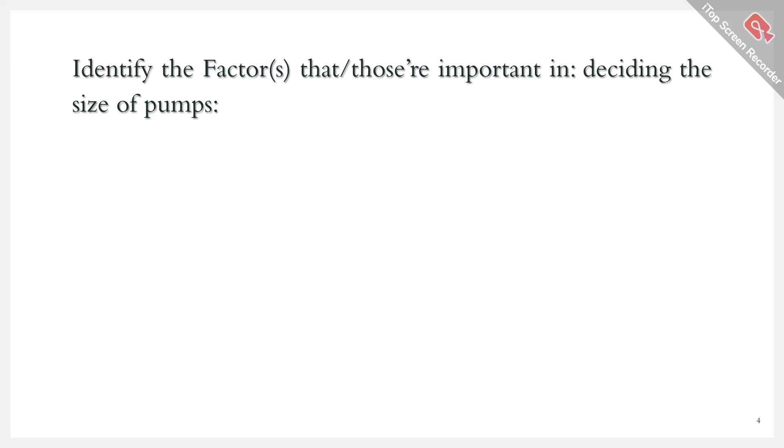Okay, let's start. Today's first question is to identify the factors that are important in deciding the size of the pumps. Option A is flow needed at the point of connection to the distribution system. Option B is fuel consumed, and option C is discharge head.

Okay, so the explanation is something like this. Pump sizes are determined as per the discharge head and flow needed at the point of connection. So both option A and C are the correct answers. Fuel consumed is not a correct answer, because fuel consumed is related to the motor. Generally, motors are electrically driven or driven by fuel oils like diesel or petrol. But the major two things mentioned in the specs of the pump, the specification details, are the flow rate, mostly in meter cube per hour, and head, discharge head.

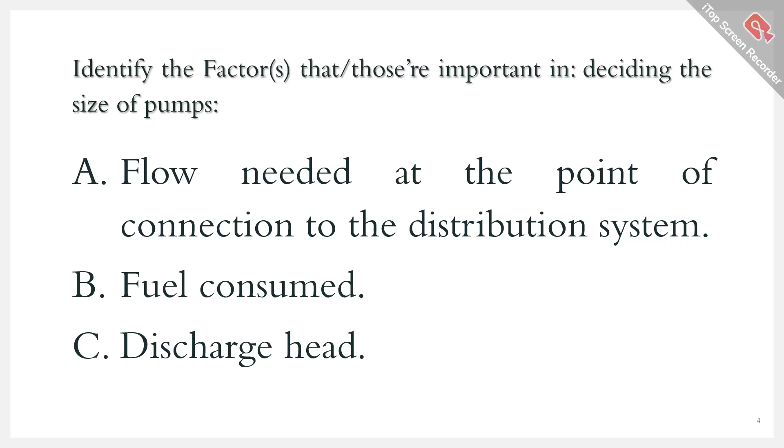So if we see Bernoulli's equation, P by rho g plus v square by 2g plus z equals constant, there the term z is the head, or the entire thing is head when pressure is divided by the product of density and gravity, the gravitational constant, and in this way pressure is converted into discharge head. So these are the two major things mentioned in any specification of pumps. Option A and C are the correct answers, and B is not correct.

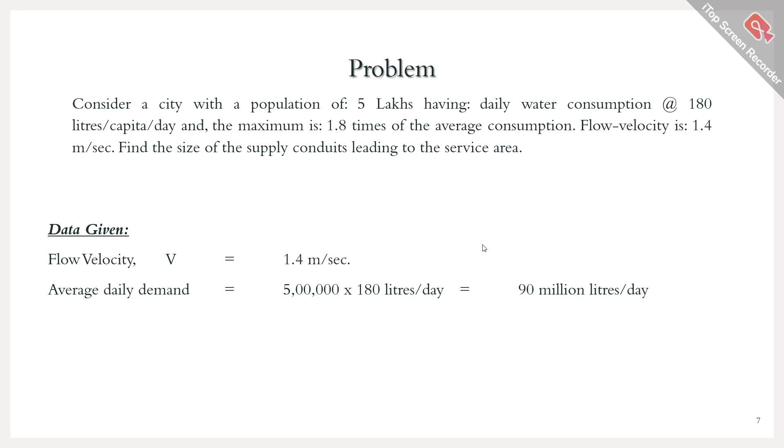So the data given are: flow velocity V is 1.4 meter per second. Average daily demand is 5 lakhs into 180 liters per day, which is 90 million liters per day. Now maximum daily demand is 1.8 times the average consumption. Average daily demand is calculated by multiplying the population with the per capita daily demand. If we multiply these two, it becomes the daily demand of the entire population. Now, this is the average daily demand. If we multiply it with the factor 1.8 given in the question, we get the maximum daily demand as 162 million liters per day, or MLD.

Okay, so the solution is something like this. First, we have to calculate the maximum design capacity, or Q, based on the above data.

So it is nothing but 162 into 10 to the power 6, as million means 10 to the power 6. We have discussed multiple times in earlier classes that million means 10 to the power 6. So 162 into 10 to the power 6 divided by 1000 into 24 into 3600. Why this factor came? First we have to convert liters into meter cube. 1 meter cube equals to 1000 liters, so that's why we are dividing with 1000. Then we are taking 1 day means how many seconds. 1 day means first 24 hours, and 1 hour means 3600 seconds, so 1 day means 24 into 3600 seconds. To convert this maximum daily demand, which is million liters per day, into meter cube per second unit, we are dividing it with this factor, that is 24 into 3600. After simplification, it gives 1.875 meter cube per second.

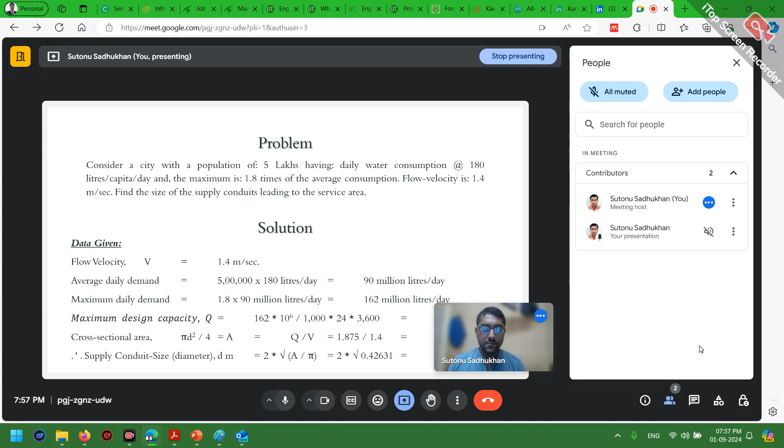So our next MCQ is... previously, the 1.306 meter was the answer, which is, whenever the size is being asked, the size of any supply conduit or pipe means the diameter of the pipe.

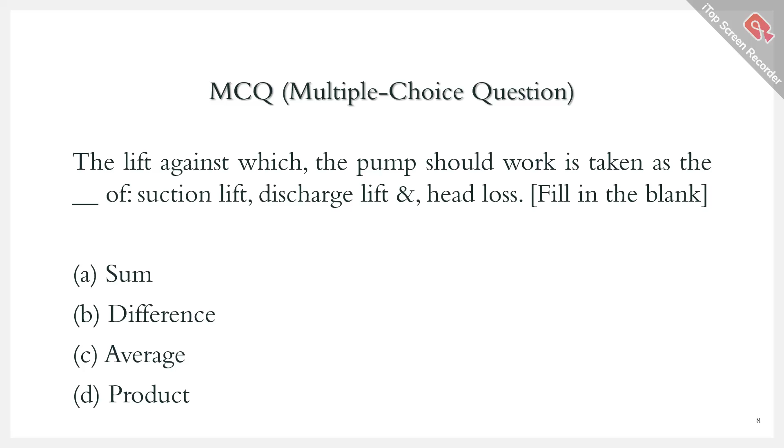Now the next MCQ is: the lift against which the pump should work is taken as the blank of suction lift, discharge lift, and head loss. We have to fill in the blanks. Option A is sum, option B is difference, option C is average, option D is product. The lift against which the pump should work is taken as the what of suction lift, discharge lift, and head loss? So the answer is the sum. The pump should work against the summation of the suction lift, discharge lift, and the head loss.

The head loss is nothing but the pressure drop that occurs when the fluid flows through the pipeline due to the friction of the fluid layers with the inner wall of the pipe, and whenever the fluid gets collided in the vents, then also head loss occurs. Discharge lift and suction lift are the lifts in the discharge side and suction side respectively. So the pump should work against all of them in order to lift the water or fluid.

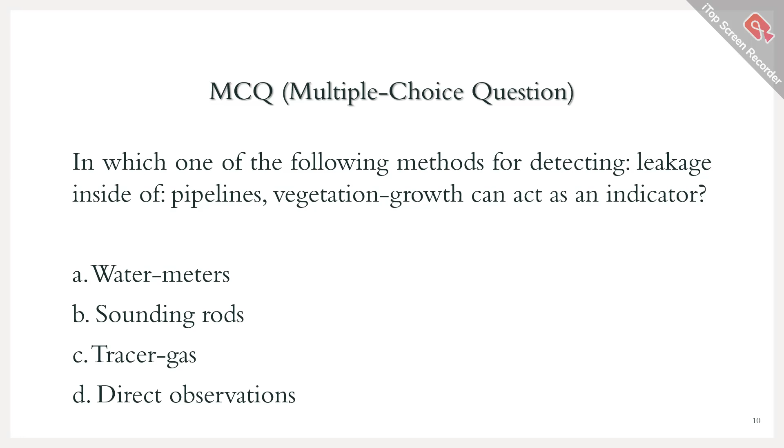The explanation is: visible wet areas and/or unexpected vegetation growth are detected through direct observations. So the answer is direct observations.

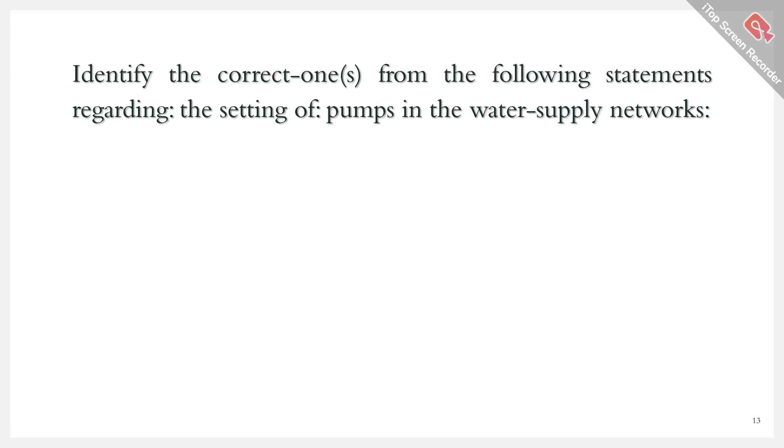Now we will have to identify the correct ones from the following statements regarding the setting of pumps in the water supply networks. Option A is butterfly valves are used for isolating the pumps in the suction side. Option B is check gate valves are installed in the discharge sides. Option C is pressure relief valves are used in the discharge sides for flow control, pressure regulation, and to protect from surge pressures. Option D is vacuum relief valves are used on the suction sides for the vertical turbine pumps. We have to identify the correct ones from the following statements regarding the setting of pumps in the water supply networks.

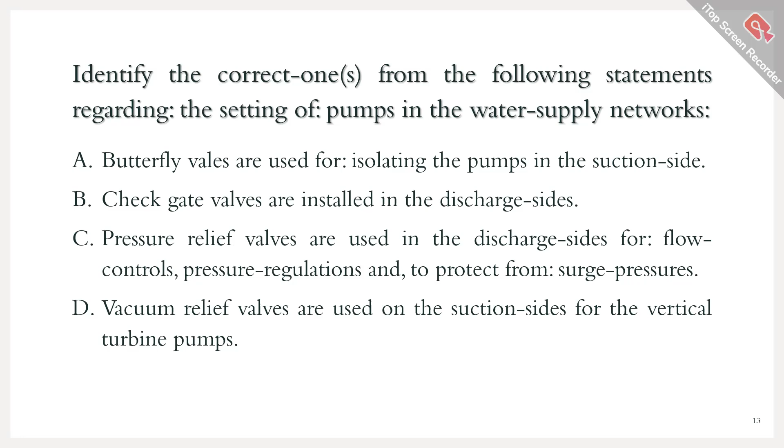So the explanation is: sluice gates or gate valves are used for the isolation of pumps in the suction lines. Butterfly valves are not used in the suction sides. Air release and/or vacuum relief valves are used on the discharge sides for the vertical turbine pumps.

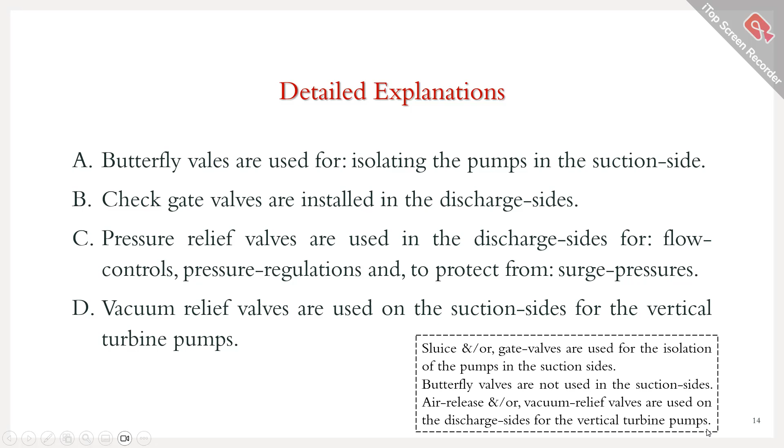So option B and C are the correct answers. Check gate valves are installed in the discharge sides, not in the suction sides, and pressure relief valves are used in the discharge sides for flow control, pressure regulation, and surge protection. Whereas vacuum relief valves are not used in the suction sides, they are used in the discharge sides, and butterfly valves are not used in the suction side, they are used in the discharge side.

Okay, now next is a problem. A water supply scheme is to be designed for a population of 5 lakhs. The storage reservoir is located at a distance of 13 kilometers away from the city. Consider head loss from the source as 15 meters. The average demand is 250 liters per capita per day. Assume that the maximum demand is 1.6 times the average. Estimate the size of the supply main using the modified Hazen-Williams formula. For metal pipes, consider CR equals to 1.

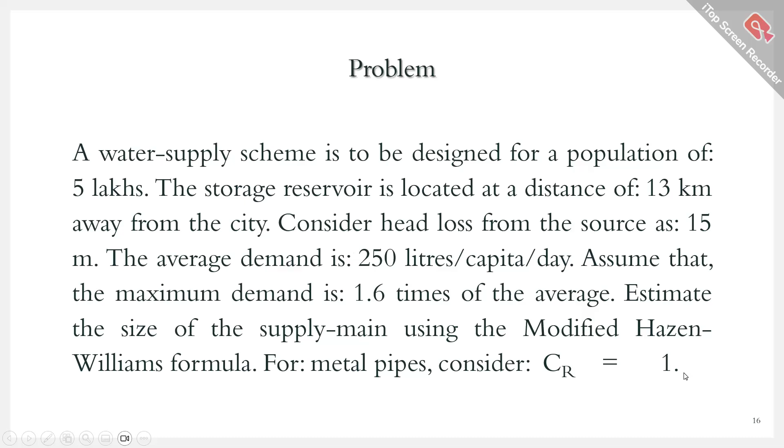As nobody is there, we will proceed with the solution.

So the detailed explanation is: modified Hazen-Williams formula is V equals Q by A. Velocity equals the volumetric flow rate divided by the cross-sectional area of the pipe, which is nothing but equals to 143.534 into CR into R to the power 0.6575 into S to the power 0.5525. This is the modified Hazen-Williams formula, where velocity is a function of CR, which is nothing but a coefficient. In the question it is given as 1. This is a constant into R into S. S is the slope of the energy line, which is nothing but the head loss per unit length of the pipe.

Now, as I told, slope of the energy line S equals head loss divided by pipe length equals 15 meter by 13,000 meter. In the question, it is given as head loss is 15 meters and pipe length is given as 13 kilometers because the water needs to be supplied at a location which is 13 kilometers away from the pumping source. So 13 kilometers means 13,000 meters. And to calculate S, we are dividing the head loss by 13,000 meters. Meter gets cancelled out, so S is a unitless number.

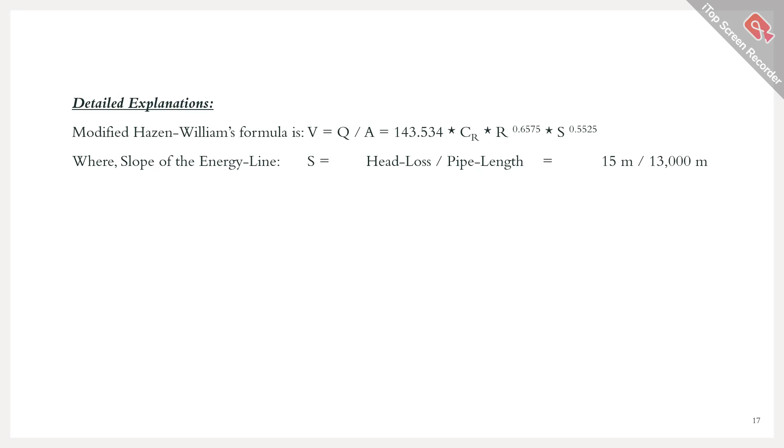Now the average daily demand is nothing but 5 lakhs into 250 liters per day. So the average per capita demand was given as 250, and we are multiplying it with the total population, which is nothing but 5 lakhs, and that gives 125 million liters per day. The maximum daily demand in the question is given as 1.6 times the average daily demand. That's why it is 1.6 into 125 million liters per day, which equals 200 million liters per day.

Now maximum design capacity Q can be calculated in this way. Maximum daily demand 200 million liters means 200 into 10^6 liters divided by 1000, this many meter cube, whole divided by 24 into 3600, this many seconds per day. That means 2.315 meter cube per second.

Now cross-sectional area A is given as pi d square by 4, which is nothing but equals to Q by V. So these are two expressions of A: one is a function of diameter, another is a function of volumetric flow rate and the velocity, which is meter cube per second and meter per second. After simplification, we get V comes to the left hand side and 4 goes to the right hand side, so V into pi d square equals 4Q, which gives V equals 4Q by pi d square.

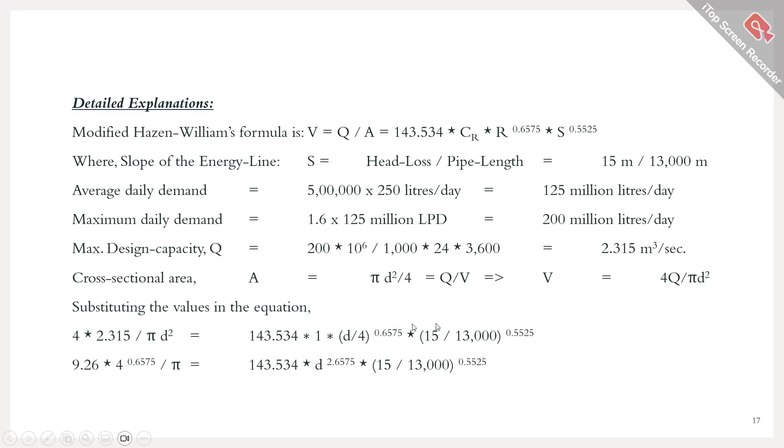This one is 1 into 143.534 gives you 143.534, and this term remains the same, 15 by 13,000, 0.5525. In this way, now we arrive at the solution.

The size and diameter of the supply main, expressed as d or diameter of the pipe in meters, gives us 9.26 into 4 to the power this divided by pi, whole divided by this constant, and this constant gives us 2.145478 equals to d to the power 2.6575. So d equals to this entire constant whole to the power 1 by 2.6575, equals to 4 by 3 meter, which is approximately equals to

1.333 meters. Now in the question, it may be given as let's say 1 meter, 1.5 meter, 2 meter, 3 meter, the options may be given like this. We have to choose the nearest option because this kind of diameters are not available exactly the way we want, so we have to take the nearest higher value from the available options. So if in the options there is 1.5 meter, it becomes our desired diameter or size of the pipe.

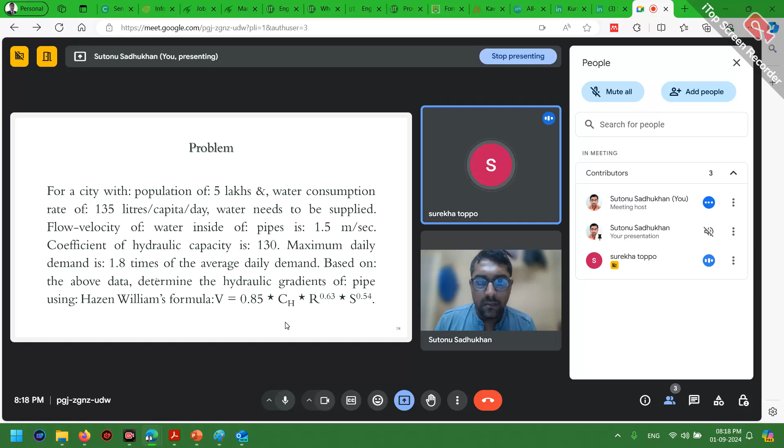Now the solution goes something like this. So have you solved the problem in the assignment? Did you face any problem like another student raised in the discussion forum? No, sir. Oh, you didn't face the problem. Okay, so we'll discuss the answer.

So the explanation goes like this. Hazen-Williams formula, as given in the question, is V equals to 0.85 into CH into R to the power 0.63 into S to the power 0.54. The velocity is given in the question as 1.5 meter per second, which can be expressed as volumetric flow rate divided by the cross-sectional area of the pipe. So meter cube per second divided by meter square gives you meter per second.

Average daily demand is the total population into the per capita demand. That means 5 lakhs into 135 liters per day, which gives us 67.5 million liters per day.

Welcome, Bubu Mukherjee.

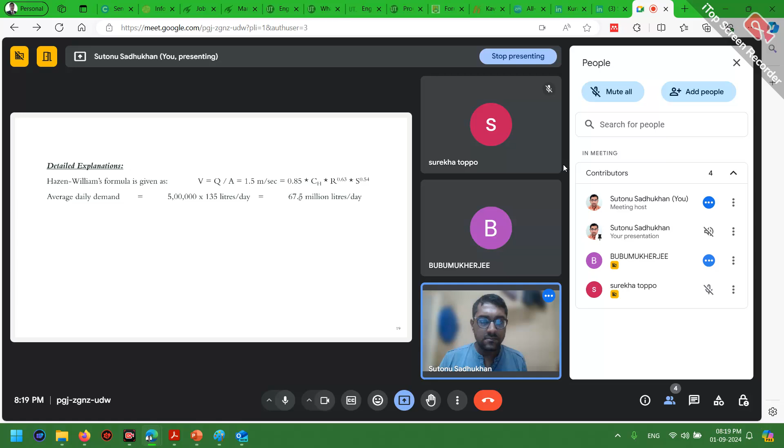Okay, so now maximum daily demand in the question is given as 1.8 times of the average daily demand, which is 67.5 million liters per day. That gives me 121.5 million liters per day.

Now maximum design capacity Q is based on the maximum daily demand, where we have to convert the million liters per day unit into meter cube per second. So 121.5 million means 121.5 into 10 to the power 6 divided by 1000 gives us meter cube from liters, because 1 meter cube equals 1000 liters. To convert from day to second, we multiply with this factor in the denominator: 1 day means 24 hours, and 1 hour means 3600 seconds, which gives us ultimately after simplification 1.41 meter cube per second.

So now cross sectional area A equals pi d squared by 4 for a circular pipe, which is also Q by V. Q we calculated as volumetric flow rate 1.41, and V is given in the question as 1.5 meter per second. We just put those two values, and in this way the value of A comes out to be 0.9375 meters square, or 0.94 meters square.

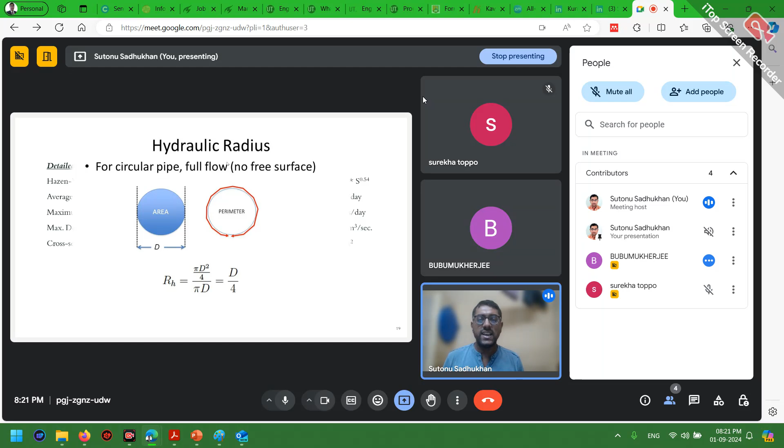Now there is a concept of hydraulic radius. I don't know whether you know this or not, so I will discuss it. Hydraulic radius means the wetted area by wetted perimeter. So if the fluid is flowing through this conduit and it is wetting the inside surface completely, that means no free surface is left - it is called the full flow condition. Under this condition, the hydraulic radius will be the wetted area by wetted perimeter.

So this D is the inner diameter of the pipe. The cross sectional area is pi d squared by 4, and the perimeter is 2 pi r, that means pi d. After simplification, it gives us d by 4. So hydraulic radius means diameter by 4. So within this Hazen-Williams formula, this R denotes the hydraulic radius, which is nothing but, as we just saw, the diameter by 4.

Now, if we just simplify pi d square by 4 equals to q by v, we have to simplify in terms of the cross sectional area. So a equals to pi d square by 4, so this 4 will come at the left hand side, 4a equals to pi d square, or 4a by pi equals to d square, or d equals to root over 4a by pi, or 2 into root over a by pi.

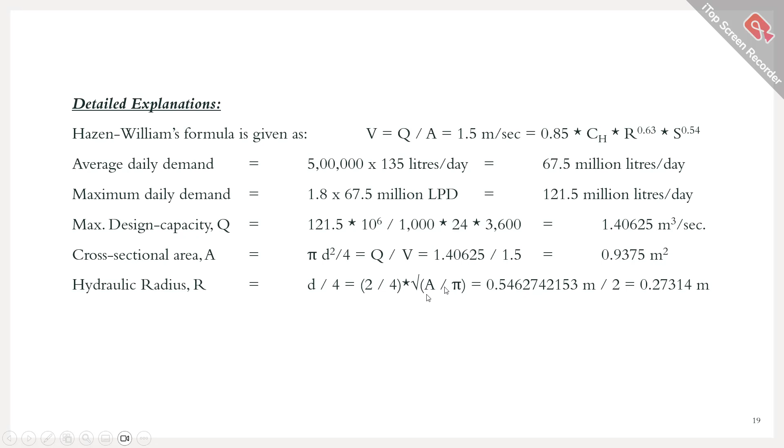After putting the value of a that we just calculated, 0.9375 here, and pi being a constant, root over that thing whole divided by 2 gives us 0.27314 meter. This is the hydraulic radius.

Now substituting this value of hydraulic radius into the Hazen-Williams formula, and also substituting the value of CH, the hydraulic capacity data given in the question as 130. We have to substitute both these values in this equation. So 1.5 remains the same, and the right hand side becomes 0.85 into 130 into 0.27314 whole to the power of 0.63 into s to the power 0.54.

From here we have to calculate the value of s. So s to the power 0.54 equals to 1.5 divided by this entire thing. 0.85 into 130 gives us 110.5, into this to the power 0.63 gives us 0.4415. After multiplication and dividing 1.5 by that multiplied value, we get 0.031.

Now, slope of the energy line or the hydraulic gradient asked in the question is S equals to this value we just calculated, whole to the power 1 by 0.54, equals to 0.00158, which is approximately equal to 0.0016. Now in the question, what has happened?

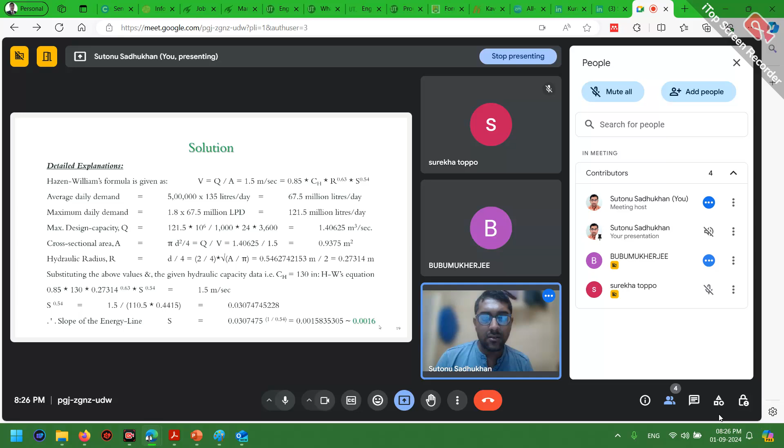This 0.0016 is given as 0.0016%, which is wrong. So all these four options are given as percentage, but it is not a percentage. If we convert this into percentage, it becomes 0.16, which makes option C the correct answer that was given last week for question number 8, if you solved it. But the percentage is not correct. If we eliminate the percentage, then 0.0016 will be the answer, so option A will be correct. As the percentages are given, either everybody will be given marks or nobody will be given marks because of this confusion.

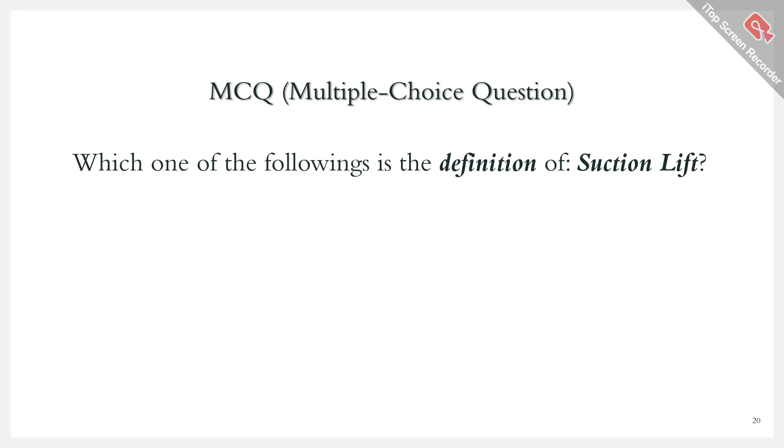Okay, so now we'll move on to our next MCQ. Which one of the following is the definition of suction lift? Option A is the difference between point discharge and the pump. Option B is work done by a pump in raising the water. Option C is difference between low water level and pump. And option D is friction loss in pipe.

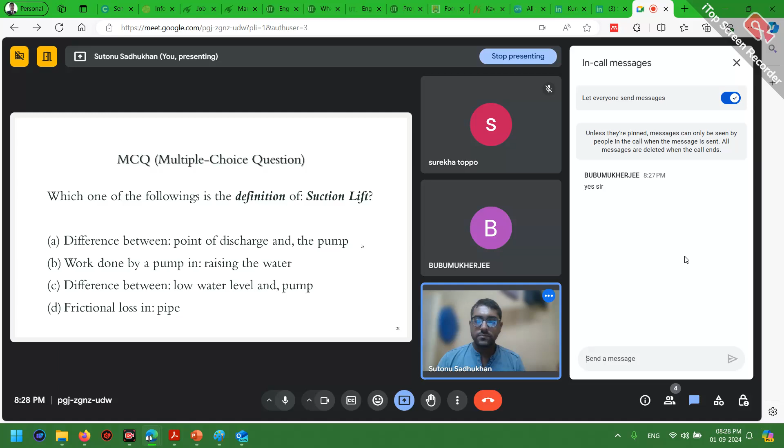So I'll move on with the answer. The difference between the low water level and the pump. Low water level at the suction side, basically, that is called the suction lift. It is the definition of suction lift. Option C is the correct answer.

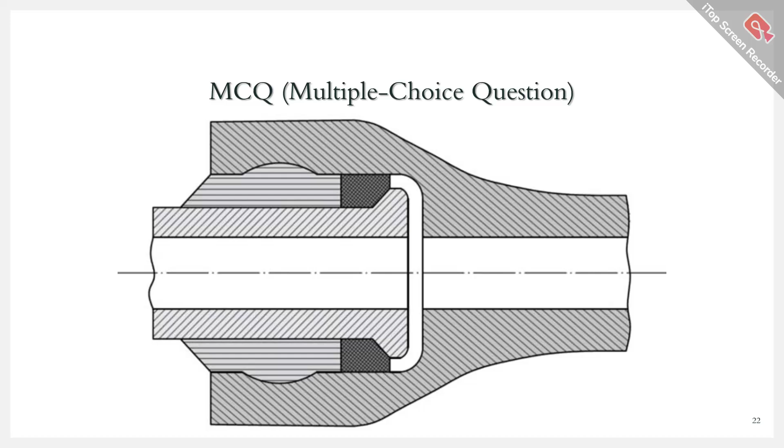Now we'll move on to our next MCQ. There is a picture. Observe the picture very carefully. Now the question is, in the following figure, which type of joint has been used for the water pipes?

Can you answer without any options? Welcome, Oruna.

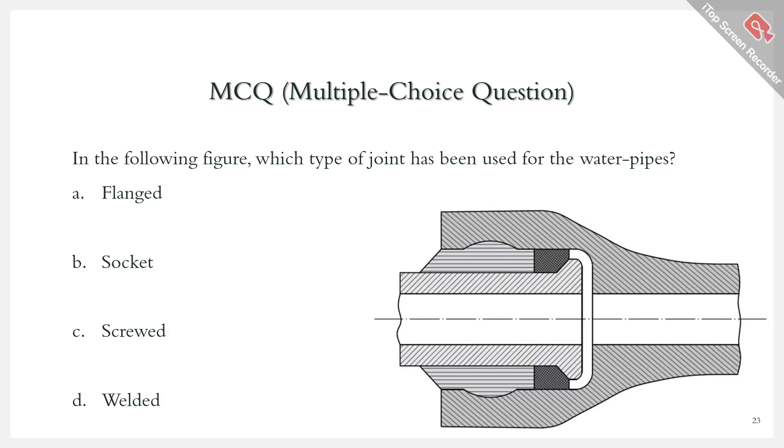So the options are A is flanged, B is socket, C is screwed, and D is welded. What type of joint is it for the water pipes? Please, everyone, type the answer in the chat box.

Okay, Bubu is telling us welded. Surekha and Oruna.

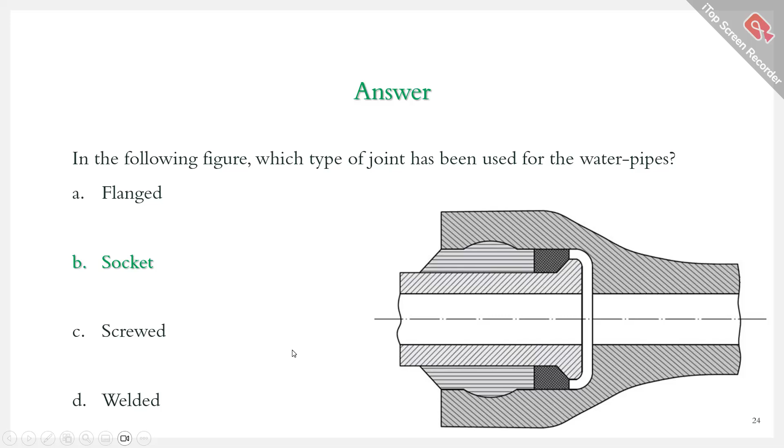Now, how are the flanges joined? They are joined with the help of screws. So the screws were also absent in our previous question. So it was your...

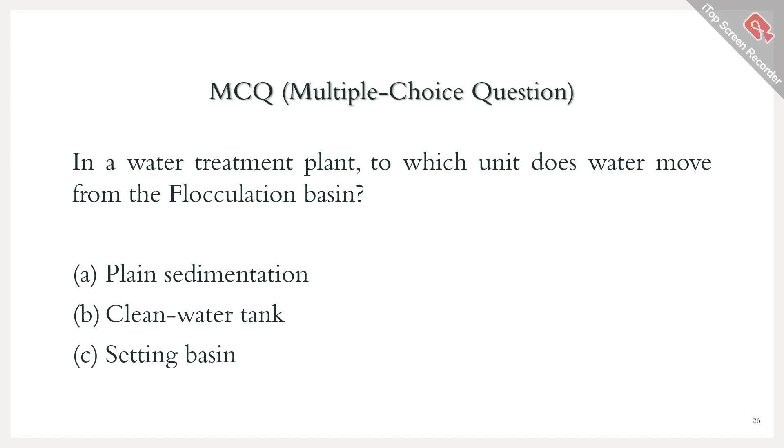Now we will move on to our next MCQ. In a water treatment plant, to which unit does water move from the flocculation basin? Option A is plain sedimentation, option B is clean water tank, option C is settling basin, and option D is pure water basin.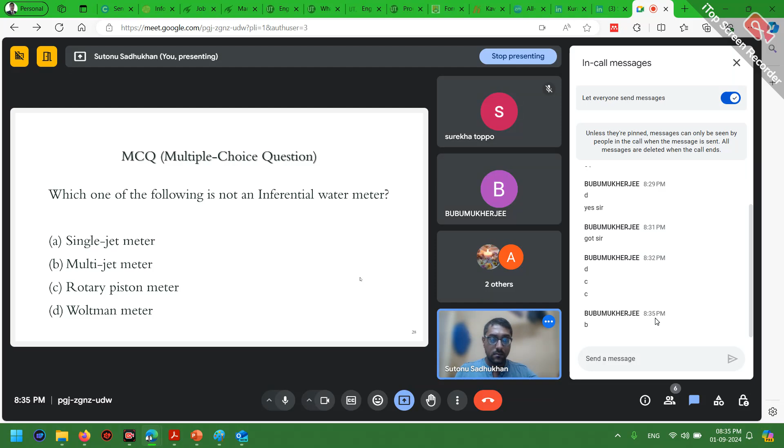Okay, so I'll move on to the answer of this question. The explanation is: rotary piston meter is a volumetric meter. Volumetric meter means not an inferential water meter, so that's why it is the answer. The others are inferential water meters.

So it's just a memory based question. It's okay if you don't already remember that. Through practice you will be able to remember.

I hope you know what a rotameter basically is. Rotary piston meter means rotameter. Sorry, it's not an inferential meter, it is a volumetric meter. The others are the inferential meters.

I hope you know how a rotameter works. There is a bob which floats, and the water flows through the pipe, and there is a drag velocity, sometimes called the settling velocity. If the water flows with more flow rate, the bob goes up. So in this way the rotameter works, and it gives you the volumetric flow rate. The rotary piston also ultimately gives the volumetric flow rate. It is not an inferential water meter; the other three are inferential.

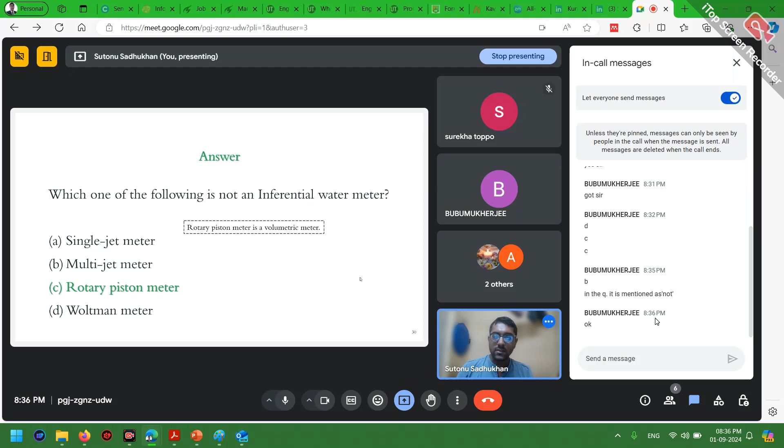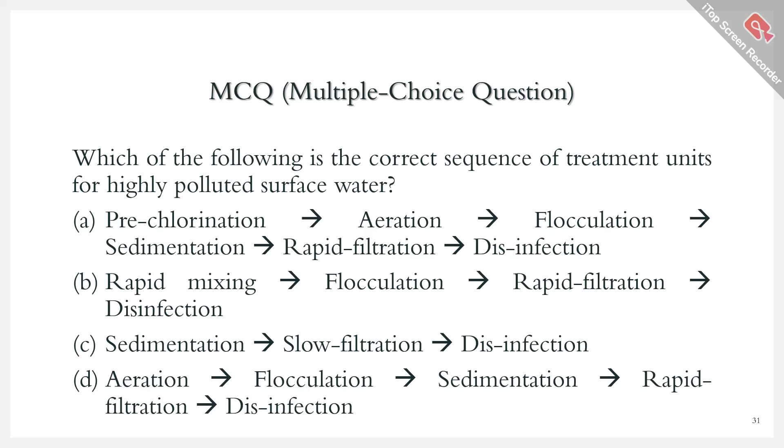Now we will move on to our next MCQ. Which one of the following is the correct sequence of treatment units for highly polluted surface water? Option A is pre-chlorination, then aeration, then flocculation, then sedimentation, then rapid filtration, then disinfection. Option B is rapid mixing, then flocculation, then rapid filtration, then disinfection. Option C is sedimentation, slow filtration, disinfection. Option D is aeration, then flocculation, then sedimentation, then rapid filtration, then disinfection.

So which one of the four is the correct sequence of treatment for highly polluted surface water? Here we can use a hint: where the maximum number of steps are involved, that will be able to treat highly polluted surface water, right?

So option C naturally gets cancelled out. Option B is also very rare that it will be the correct answer. It will be either option A or option D.

Okay, so here Bubu has correctly answered. It is pre-chlorination, then aeration, then flocculation, then sedimentation, after the rapid filtration and disinfection.

So now here we can see if we just directly throw this polluted water into the aeration basin, what will happen? The bacteria or microbes, those aerobic bacteria present in the aeration tank for treatment of water, they may get affected. Their population may die, right?

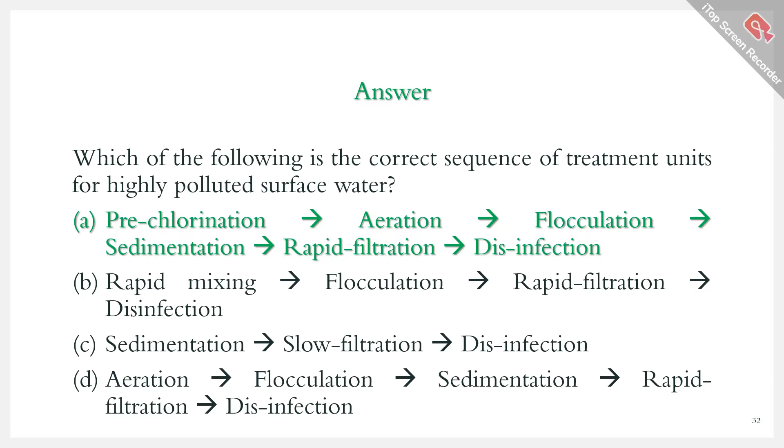Okay, now we'll move on to our next MCQ. Flanged joint is preferred in dash pipelines and can't withstand dash. You have to fill in the blanks. Option A is main corrosion, option B is temporary vibration, option C is submain vibration, option D is main vibration.

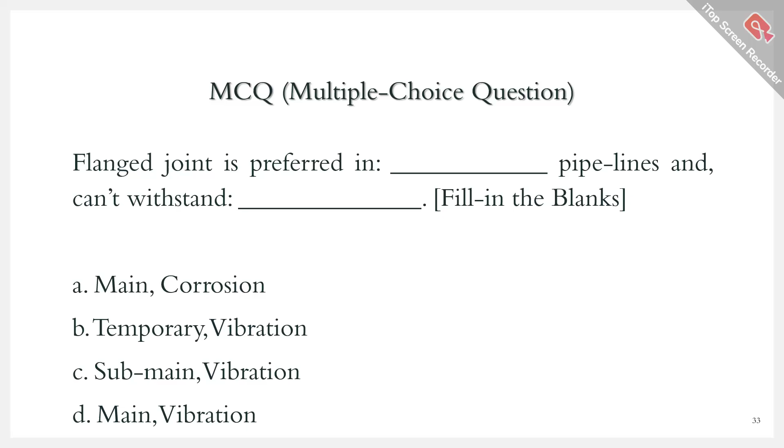So what flange joint can't withstand? Is it corrosion or vibration that you have to determine? And then where the flange joint is preferred? Is it in main, temporary or submain? What kind of pipelines the flange joint is preferred? That you have to answer.

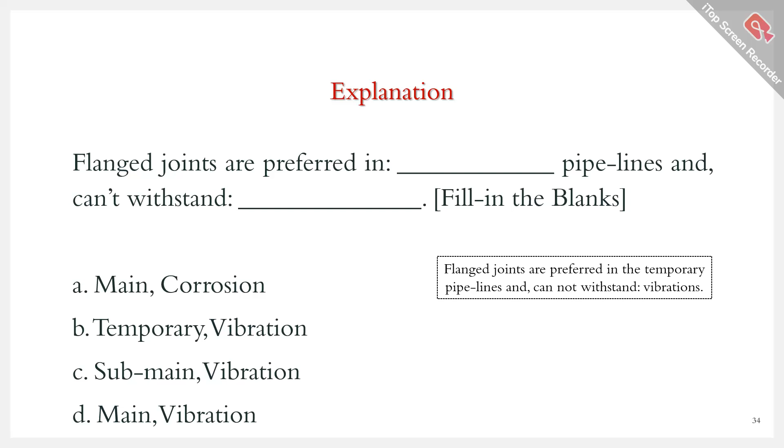Okay, so the explanation is flange joints are preferred in the temporary pipelines and cannot withstand vibrations. So option B is the correct answer. Okay, so flange joints can withstand corrosion.

It depends on the material of construction. If there are different SS grades, that is the stainless steel grades like SS316 and SS304 or something, so these different grades are there. There are also cast irons, CI, or cast steel, CS. Different kinds of materials of construction are there. If we are just handling one kind of corrosive fluid, let's say sulfuric acid, we can use MOC, that is material of construction for the flanges, that is resistant to the corrosive fluid. For example, carbon steel, we can use that to prevent the corrosion.

So basically, vibration is the correct answer. That eliminates our option 1. The others are B, C, and D. So why that is main? Because as flange joint can't withstand vibrations, there is the highest vibration in the main pipelines. From the main, the submain pipelines come out, and from the submain, the temporary pipelines.

Sorry, yes, from the submains, the temporary pipelines come out. Right now, in the main, you see the cross sectional area is very high, and these temporary pipelines or submain pipelines, the cross sectional area is very low. So basically, if the same amount of fluid flows through all of them, if the cross-sectional area is low, the velocity will be higher in case of temporary or submain, right? As compared to main, in case of temporary, it will be highest. So that's why.

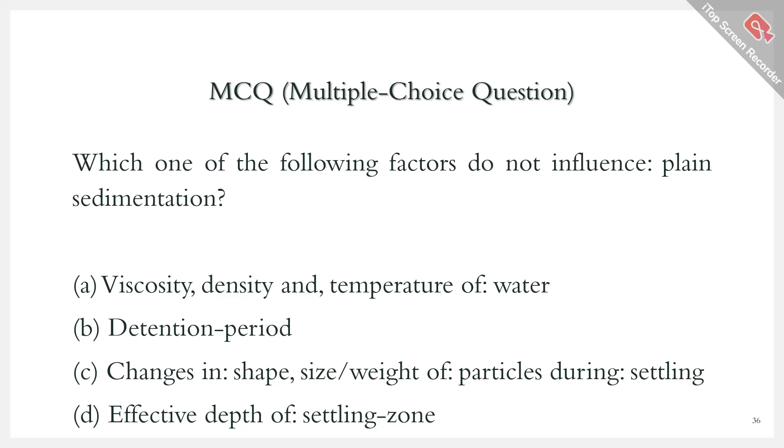It is also a memory based question. Three factors influence plain sedimentation. What are the three factors and which factor doesn't influence? That you have to identify.

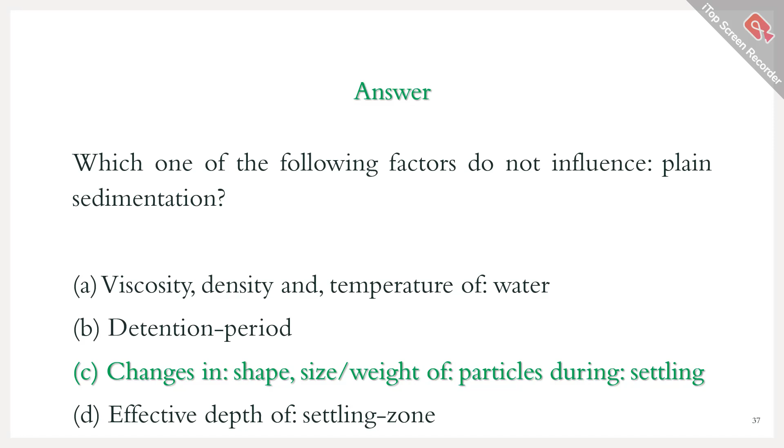For grit removal, we have solved one problem in the earlier classes. If you just remember that problem, and also we have shown how grit chamber works. The sedimentation is not completely the same, but it also works in a similar way. If you remember that picture, I hope you'll be able to answer. Otherwise, if you've watched the lecture, you'll be able to answer. The answer is the changes in shape, size, and weight of the particles during settling. This is the factor that does not influence plain sedimentation, but if it is not plain sedimentation, then it will influence.

Now we move on to our next MCQ. Which one of the following is not considered while deciding the land available for the design of the distribution networks? Option A is sizing of water pipes. Option B is water distribution systems. Option C is water treatment units. Option D is water reservoir locations.

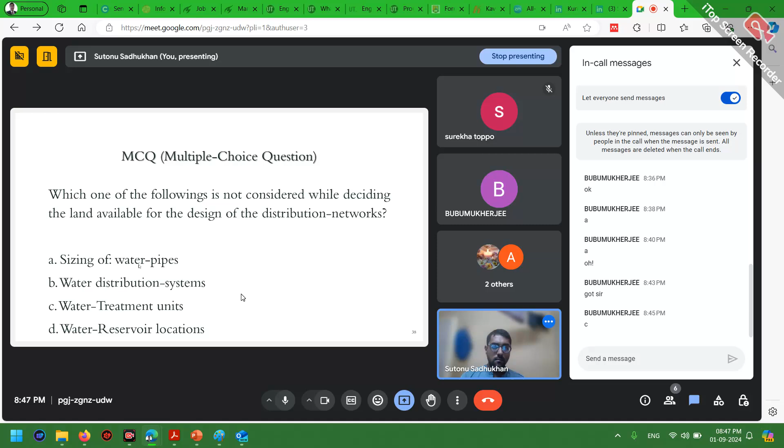While designing the distribution network, which one of the following factors is not considered, while deciding the available land?

So the answer is sizing of the water pipes. Water distribution system is related to the distribution network. Water treatment units - different tanks will be there, like the flocculation tank, sedimentation tank, the settling basin, the aeration tank, pre-chlorination tank, and disinfection tank. So the sizing is required, and it will be considered because the tanks take significant available land, and also the water reservoirs before and after treatment take significant land. But sizing of water pipes doesn't take much space in terms of land available. That's why it is not considered while deciding the land available for the design of the distribution networks.

What happens if there is a pipe rack - let's say you're enhancing the capacity of a treatment plant. Then definitely the sizing of the water pipes will come into the picture, because you have an existing pipe rack with a defined, limited capacity for the water to carry through. The pipe racks have a limited ability to withstand the weight of the heavy pipes flowing through them. So if you want to increase the capacity of the water treatment plant, sizing of the water pipes will definitely be considered. But at the preliminary design of the distribution network, which is the major design in our case, sizing of the pipes is not considered while deciding the land availability.

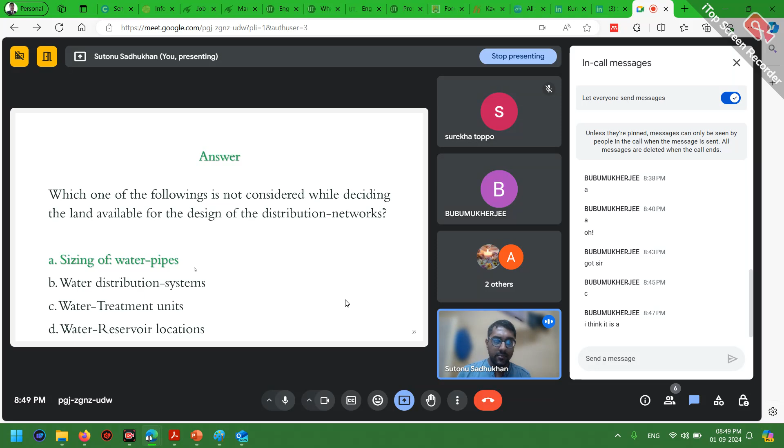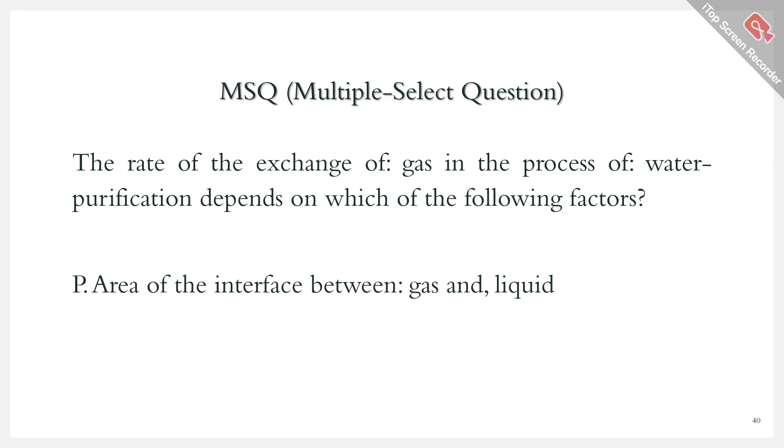Now we move on to our next MSQ - a multiple select question, where more than one option may or may not be correct. Whatever we've seen till now were multiple choice questions with only one correct option, but in this question multiple options may or may not be correct - maybe only one option is correct. The rate of exchange of gas in the process of water purification depends on which of the following factors? Option P is area of the interface between gas and liquid. Option Q is partial pressure of the gas. Option R is compression depth of air. Option S is time of contact.

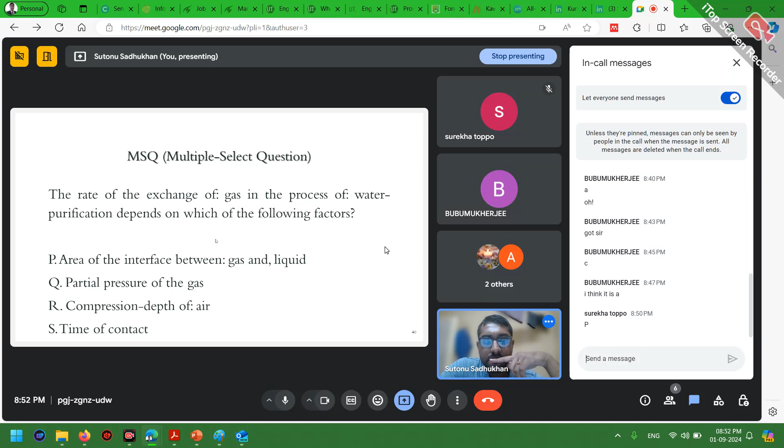The rate of exchange of gas in the process of water purification depends on which of the following factors? Let's assume an absorber column where gas is being absorbed in a liquid. What factors will affect the rate of exchange of gas? Let's say carbon dioxide is getting absorbed into water, which gives you carbonic acid, making it acidic. You want to strip it out - remove the dissolved carbon dioxide from the water in order to treat it, using a degasser column. What are the factors that may influence the exchange process within that column? Time of contact will definitely be a factor - the more time the acidic water spends in the column, the more stripping operation will happen. So time of contact should affect it. Area of the interface between gas and liquid - option P, as Surekha has told, should definitely affect it too. Let's see what the other factors are.

So the explanation is something like this. The rate of gaseous exchange depends on the interfacial areas between gas and liquids, as Surekha correctly pointed out. Thickness of the interlayers, contact times, as I told, and then what else? The partial pressure of the gas and the degree of undersaturation and or oversaturation of the gas. So option Q is also another correct answer. So option P, Q, and S are the correct answers. Partial pressure of gas.

If any one of you are from a chemical engineering background, then you know that the gaseous exchange process essentially calls a mass transfer process, and in the mass transfer process, partial pressure of the gas is a major factor. So that's why option Q comes into the picture. But compression depth of the air has nothing to do with the exchange of gas for water purification. Okay, so option P, Q, and S are correct answers.

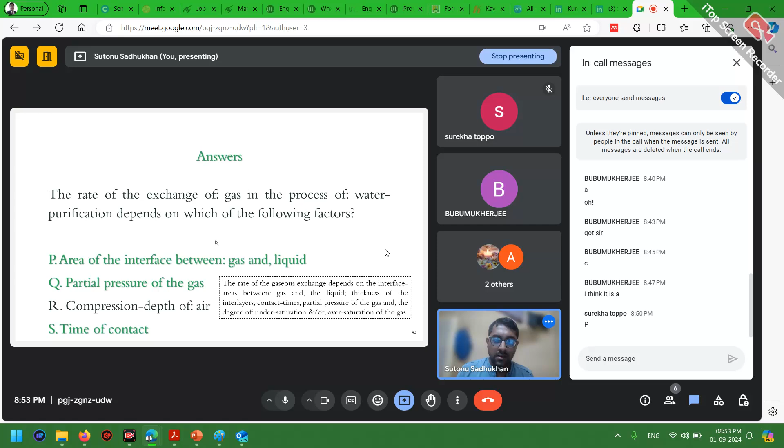Now we'll move on to our next MCQ.

Which one of the following statements is true for the looped system of pipe network design? Option A is entering and leaving flow is discontinued. Option B is the quantity of water entering and leaving the pipe junctions are not equal. Option C is law of continuity must be satisfied. And option D, discharge and flow direction always remains the same with the change in demand.

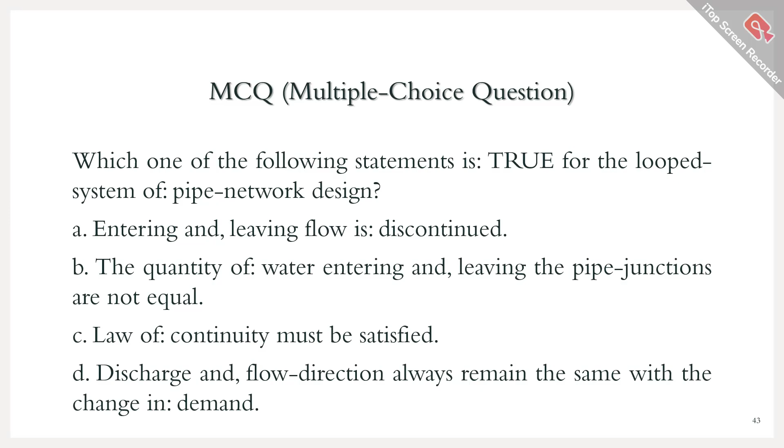I'll wait for 2 minutes. This problem, you have to think a bit. You can see, what I feel is that option D, I don't think it can be correct because the flow direction may remain the same, but discharge capacity will not remain the same. If the demand increases, discharge will increase, I guess.

Entering and leaving flow is discontinued - I don't think also it can be a correct answer. I don't think so because the entire flow is continuous in water treatment, be it an upstream water treatment plant or a downstream water treatment plant. So in all these cases, the flows are continuous. Even in a batch process it is continuous. So batch process doesn't mean discontinuous, flow is not discontinued in that sense. So maybe option B and C, one of them must be correct.

Surekha is telling us option C. We'll see what is the correct answer. So yeah, you have identified it correctly. Law of continuity must be satisfied. Law of continuity means what? Area into velocity must remain constant. A1 into V1 equals to A2 into V2, which is nothing but the conservation principle of mass. So as the temperature is not varying much, we are assuming constant density of water. That means the volumetric flow rate remains constant. That is nothing but the law of continuity.

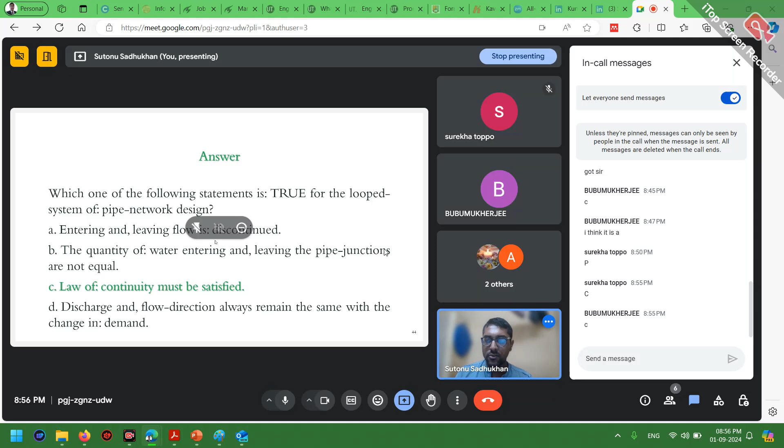Yeah. So now we will move on to our next MCQ.

Which one of the following treatment methods - it is also a single correct answer question because it is not MSQ, it is MCQ - is primarily used to remove pathogenic bacteria in the water treatment plants? Option A, disinfection. Option B, hardness removal. Option C, filtration. Option D, aeration. It is a pretty easy question. All of you should answer.

Yes, Bubu has also answered the previous question. C was the correct answer. So all of you should answer this. Dipti and Aruna also.

It is a very easy question. Which one of the following treatment methods is primarily used to remove pathogenic bacteria in the water treatment plants? Which one is associated with removing bacteria? Disinfection, hardness removal, filtration, and aeration. Bubu is telling us D.

See, the D aeration - I'll start from the last one only.

Aeration tank - generally the bacteria present in the aeration tank, and you are telling us C, filtration. Okay, I'll explain them. In the aeration tank, the bacteria present are mainly taken from cow dung.

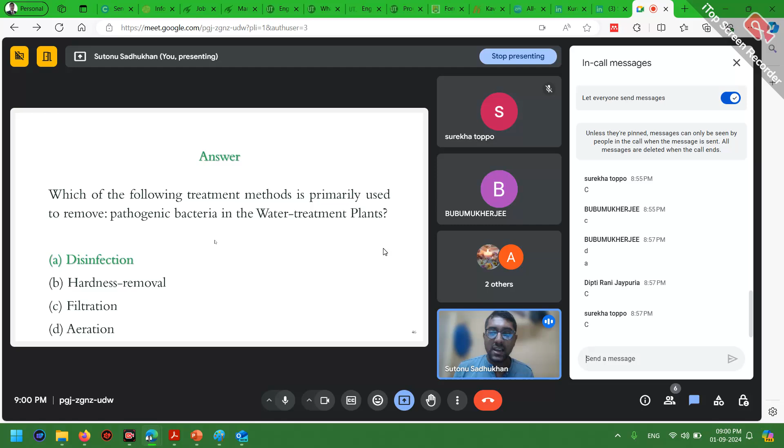Filtration is related with removal of large particles like leaves, dust, bigger dust particles which are visibly present inside the water. Aeration, as I told. So all three options are not correct - option A, disinfection, is the correct answer in this case.

So now we'll move on to our next MCQ. In the process of hydraulic network balancing, distribution of the pipe flows and pipe dash are balanced. So pipe flow is balanced with what - pipe profile, pipe depth, pipe outgrowth, or pipe head losses? That you have to identify.

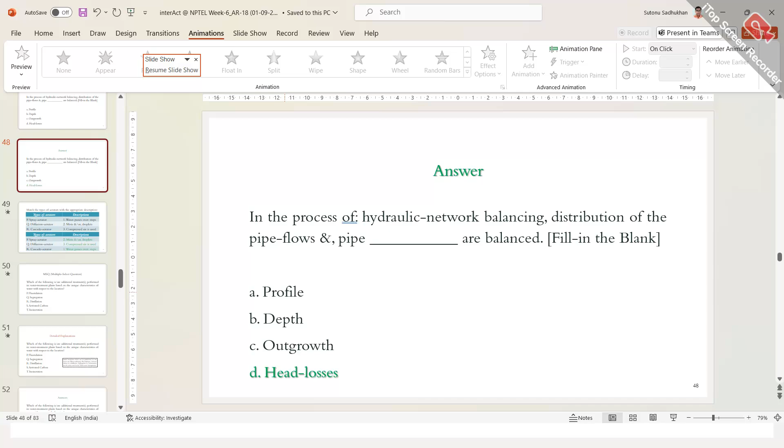Okay, I guess as the time is almost up, this is the last question we are going to discuss. The other things we'll discuss in the next class. So yes, has anybody answered it? Okay, Bubu is telling us option D, head loss. Dipti is telling us option B, depth.

For hydraulic network balancing, what do you have to balance? Whenever you are designing a pump, two things we have to majorly consider. One is the flow rate, the volumetric flow rate in meter cube per second, and another is the head loss. Head loss is basically the pressure drop, expressed in terms of Bernoulli's equation, where you divide P by rho g. P is the pressure, rho is the density, g is the gravitational constant, 9.81 meter per second square. If you multiply rho with g and divide P by that, you get the head loss. That is option D.

Okay, so that was true in case of pump. Now in case of pipe, what is true? In case of pipe also, option D is true, because outgrowth is not related to design.

In case of design, you will run the plant in such a way that you will disinfect the water, and you will also use UV or other disinfection procedures like ozone or chlorine treatments in order to stop the outgrowth. So you will not design the plant considering outgrowth, right?